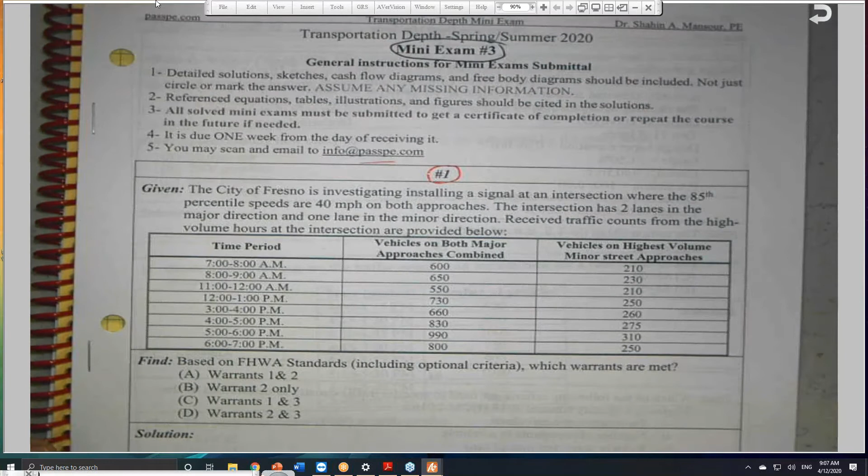If you look at the first problem, this is a signal warrant based on the MUTCD 2009. Let me write the entire explanation. I explain the warrant and sent you a flow chart for warrant number 1, which is the 8-hour warrant, the most confusing one.

I hope that I will have time to finish all the warrants from 2 all the way to 9, in some kind of flow chart like the one I sent you. A flow chart, I found it may be useful. I hope that I can complete this one day.

So here, for example, he is asking: the city of Fresno is investigating. I hope that you get a chance to print it out. Again, I should do my best to email it to you as early as I can, but things always get in the way. So I hope that you get a chance to print it out. If not, follow me, and when you print it, you will hopefully be able to retrace all the information that we talked about.

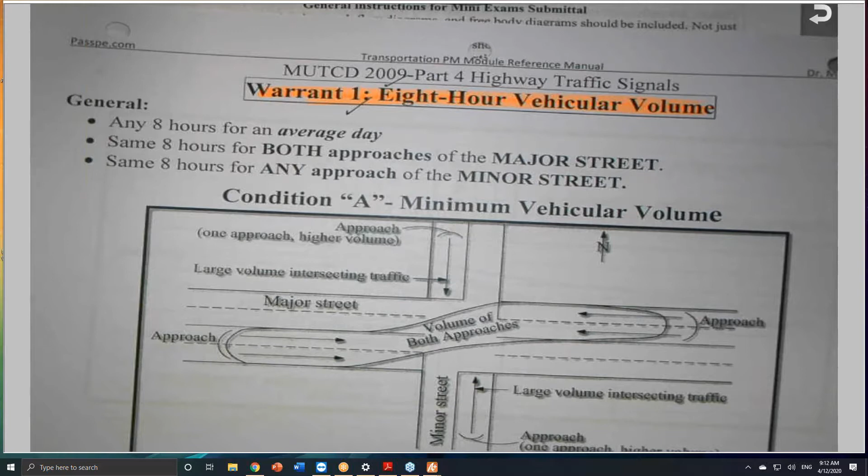So warrant number one, which is the 8-hour vehicular volume, they provided us with the big table in the MUTCD 2009, which is the current code. So the 8-hour volume, vehicular volume criteria is based on the number of lanes and the volume.

So if we consider this illustration, we have a major street, and here I assume that we have two lanes in each direction. The MUTCD, they call this an approach. So approach is a direction. So this is an approach and this is an approach. This is the definition of approach per MUTCD.

So if this is a major street, the MUTCD is looking to the major street volume, and they consider both volumes. This is why I put it that way - volume of both approaches.

So when we do the calculations, if the volume per approach is given separately, and sometimes they do that, by the way, you're supposed to add this to this. So they will tell you, for example, the westbound, eastbound, northbound, southbound, you have to know exactly. Here, for example, this problem, for the major approach, or the major street, sorry, he gave you the combined approaches. So here, he already added them up.

But in another problem, you will find that this table is divided into two, okay? And they will tell you the eastbound and the westbound, northbound, southbound, it depends on the direction. And in this case, you have to add the total. So along the major street, this is, for example, a northbound, and this is a southbound.

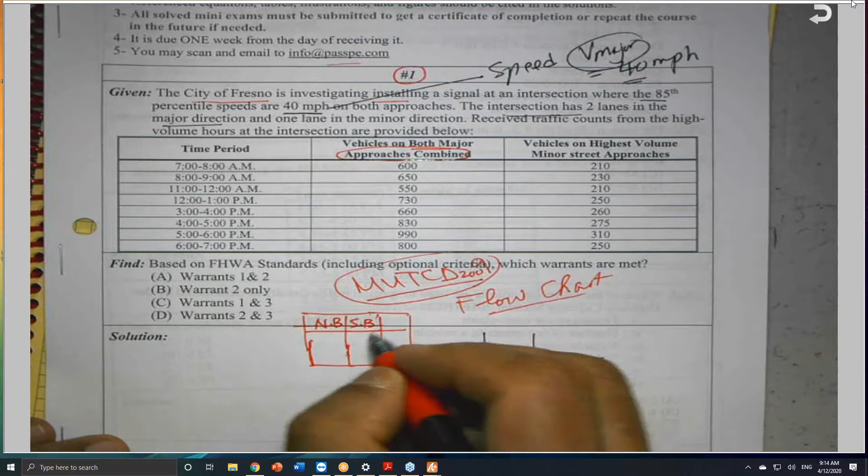Okay, assuming another orientation, and he gave you a volume here and a volume here. So in this case, you have to say total. So you add the numbers here and the numbers here to put them here. And these are the numbers that we are going to use to enter the table and decide if the warrant has been met or not. So I need you to be aware of that.

So here it is already combined, which makes our life a little bit easier. But for the minor street, the current code is - you have to define what is a minor and major. Okay, so this is also called an approach, and this is called an approach.

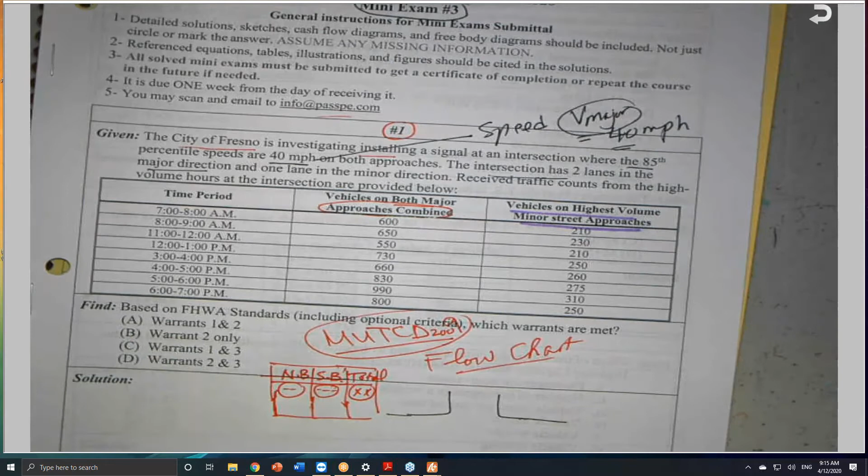So approach, it is one approach volume and one approach. Okay, in this case, since we are not adding the volumes on both approaches of the minor street, the code is saying the larger volume. So in this case, we are looking for the larger. And this is why you will find that the table given is 'vehicles on the highest volume minor street approach.' So in this case, whatever approach has the largest volume is going to be considered.

So far, so good. So this is the thing that I was referring to, the flow chart. I did this in order to help, and I hope that... maybe there is something similar - I didn't really search if there is something similar on the net or not, and you can search it if you have any flow chart that will help you understand the warrants. It will be a very good idea.

So anyhow, this is called condition A, which is the minimum vehicular volume. They came up with another situation, they call it condition B. And we'll see when we should apply condition A, and when we should apply condition B.

So this is the interruption of continuous traffic. Again, the same concept - this is the major, and this is a minor. These are the major, so in this case we are taking the two approaches together for the volume, and the same thing for the minor street, which is this one here, and the highest volume.

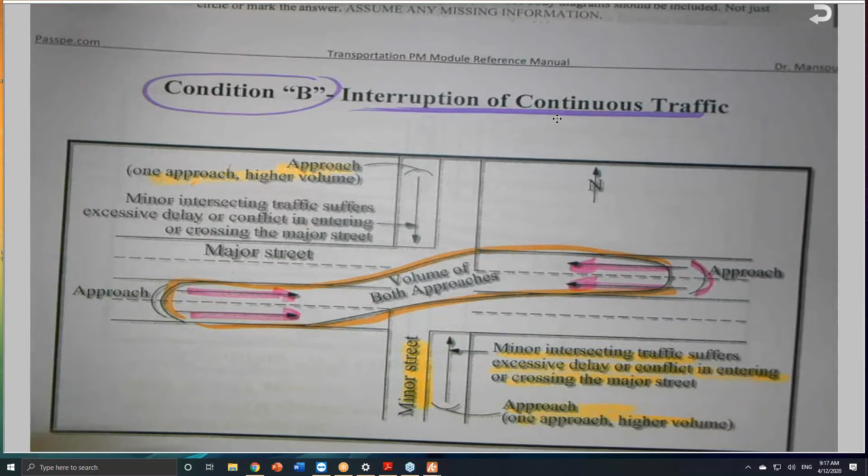This condition B, as in 'boy', intends for what? That the minor intersection traffic suffers excessive delay or conflict in entering or crossing the major street. So they came up with condition B in order to take care of the traffic along the minor street where there's excessive delay or conflict with the traffic on the major street. So every criterion they put has a justification, as I went over all of them when we covered signal warrants.

So we have something called condition A and condition B in the table. This table is given in the MUTCD and in every book available in the market, including mine, my transportation reference module manual.

So what I did, I took this and put it in the flow chart, these fine print notes below the table, to illustrate and explain to you.

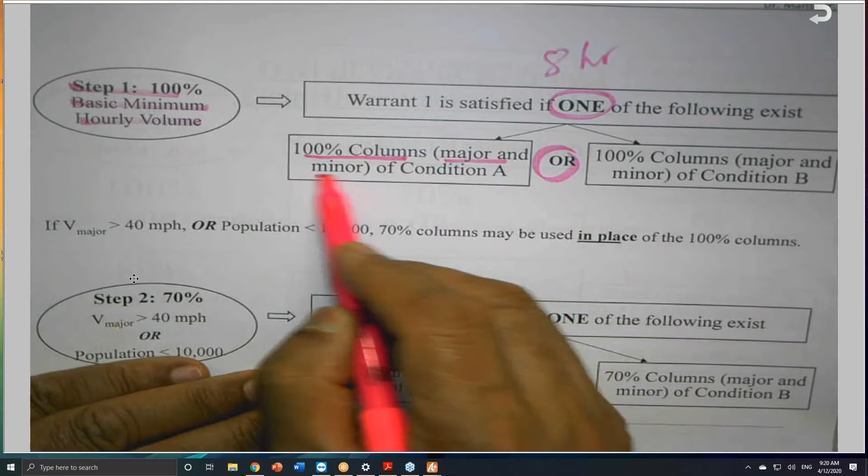Warrant number 1 is the 8-hour warrant. It is considered to be met if, and I call this step number 1, basic minimum hourly volume. We have to pay attention to the word 'or' and 'and'. So if the 100% columns, major and minor, of condition A, or 100% columns, major and minor, of condition B.

So either condition A or condition B for the 100% column, because we have a column here called 100%. Here it is, 100% for condition A and 100% for condition B. So if you have met the requirements or the volume, in this case, you are satisfied.

They came up with something called 70%, which can be used instead of the 100%. But when we use the 70%, this is step number 2 of my flow chart. This is step number 1 and step number 2.

Step number 2: if the V major exceeding 40 miles per hour, or the population less than 10,000 - and this is a key in the calculations. The moment you see in the problem statement that the major speed, V major, exceeds 40 miles per hour, or it hints at population less than 10,000, I will jump immediately here. Warrant number 1 is satisfied if one of the following exists.

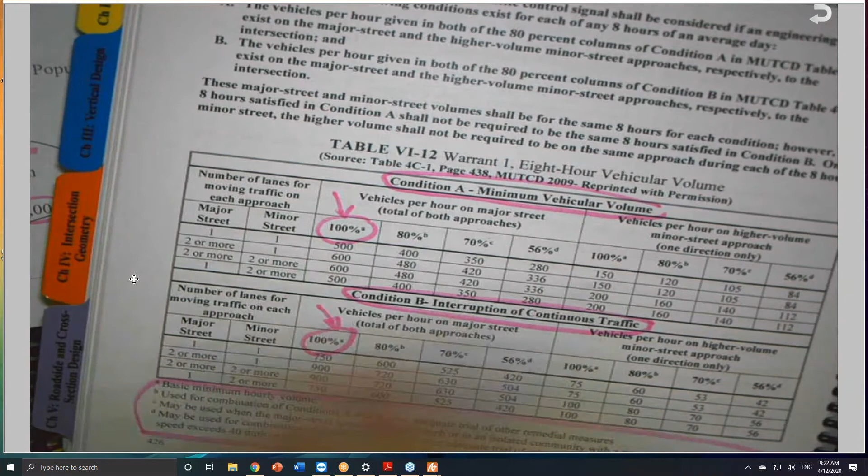Probably I think it is better to add 'if one of the following exists.' The 70% columns for the major and minor for condition A, or the 70% major and minor for condition B. Because we do have the 70% columns, here it is, 70% and 70%.

This is step number 2. Step number 3, we will go to 80% and 56%. 80%, which I call step number 3. Warrant number 1 is considered satisfied if the following exists, and both - you see the word 'both,' I put it, so you have to say 'and' here, since both conditions must be met.

So the 80% columns along the major and minor for condition A, and the 80% columns major and minor for condition B. This is step number 3.

Step number 4, which is related to the 56%. The 56% is similar to the 70% in the sense that if V major is given to exceed 40 miles per hour, or - remember the word 'or' - population is less than 10,000. So in this case, again, the word 'both' here and here.

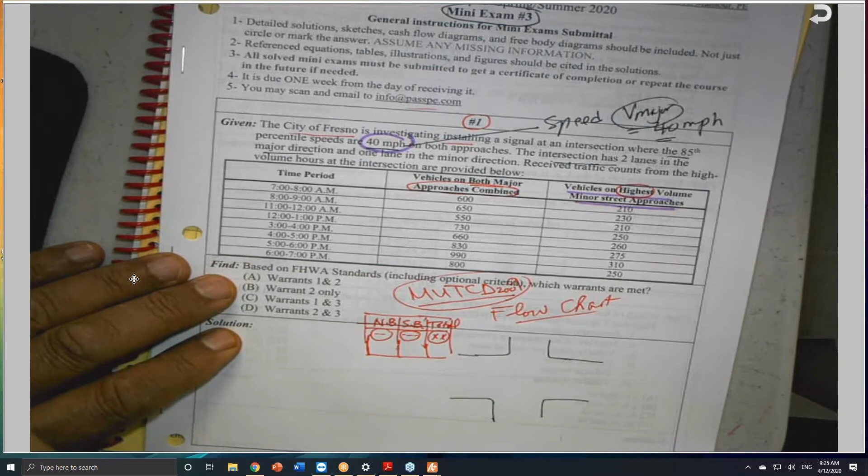The 70% and the 56% will be used only if the speed, V major, exceeds 40 miles per hour - exceeding, not equal. For example, in our problem here, he told you the speed is 40 miles per hour. So this is not qualified, because it's exactly 40, and the speed must be greater than that.

But not necessarily both in order to. So

This is a summary. If you remember the 80% and 56%, they are saying that both, that means this and this, and this and this. You have to be careful about that, okay? So in this case,

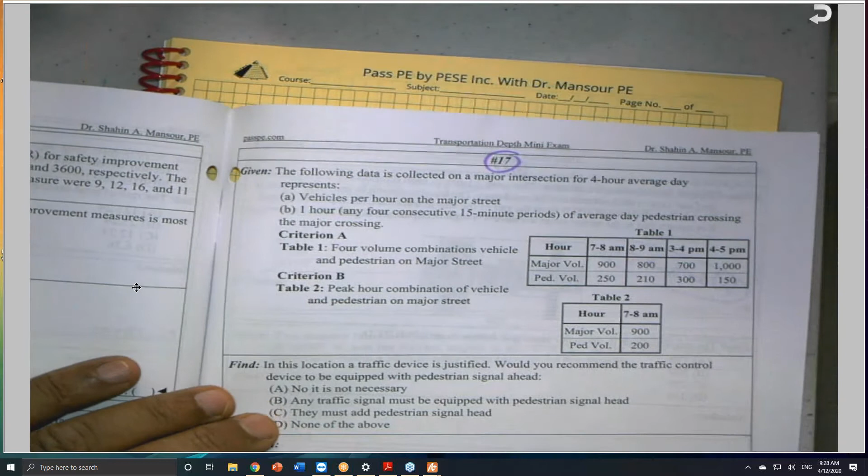Also related to traffic signals, and I don't remember if I included more. So anyhow,

I will be glad to scan this again and send it with my notes.

And I didn't get a chance, for those who attended the class yesterday, the civil breadth AM and the construction PM. I said I will do it after I finish, but believe me, after I finish, I was almost a case, because the night before I didn't sleep well. But I'm trying to push myself as hard as I can to help you guys, to keep you busy because you are sitting home, and I know this crisis.

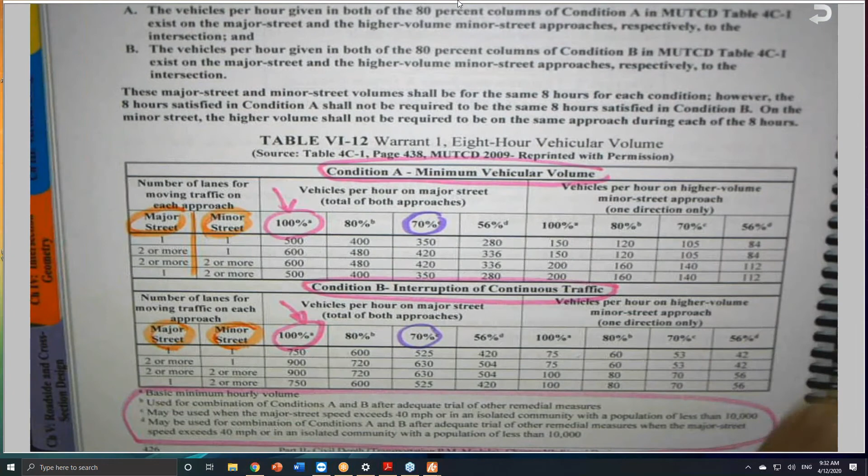So in this case, we are not having anything about the... look into this chart here. So this and this are not applicable in my case, the 70% or 50%, 56%.

So I have either 100% or 80%. And by the way, just for the sake of discussion, if you look at the volumes in condition A, the volumes here, 500, we have 750 here. 600, 900 here.

Okay, I needed to be aware of that. The volumes here, okay? So for the major street: 5, 7, 4, 6, 350, 525, 280, 420.

But if you look to the volume, this is a major. If you look to the minor, the picture is reversed. Here is 150, here is 75, 120 and so on. So the volumes here are more than here.

I needed to pay attention to that, okay? So based on that, even if you don't have the book or the table from whatever book you have right now, do you think warrant number 1 has been met? Warrant number 1.

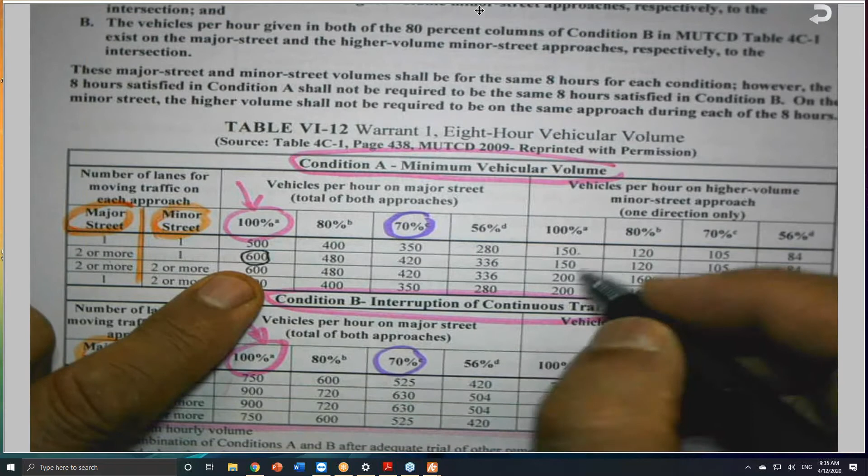I need 600 along the major and along the minor 150. Okay, the 8 hours must have these numbers, 600 and 150. So 600, I have 600, I have 550 here.

That's it. If you would like to say, oh wait a second, you tried 100% under condition A, but it says that I can go to condition A and B under 80%. Let me just do it, and I will tell you why I'm doing this. If you go under 80% for condition A and B, you must meet condition A and B.

So this here, 480 and 120. For here, I have 720, and here I have 60. We just failed the 550. So in this case, the 720 obviously will make this fail. So warrant number 1 has not been met. Warrant number 1, the answer is no.

If this is 100% sure, I can eliminate this answer, and I can eliminate this answer. Agree or disagree? We need to make sure that all of us are on the same page, because I need to make sure that you really understand all these things.

Okay, so the answer is no, as I heard it from one of you. If you disagree with our friend, or agree with me, let me know. So far so good.

Warrant number 2, 4 hours. The 4 hours, they are saying that, which I will take you through, the 4 hours, which is also MUTCD, the 4 hours. The 4 hours, they give us 2 charts. This is a chart here, which I call the base. And this is figure 4C-1 on page 440 if you have the original document with you.

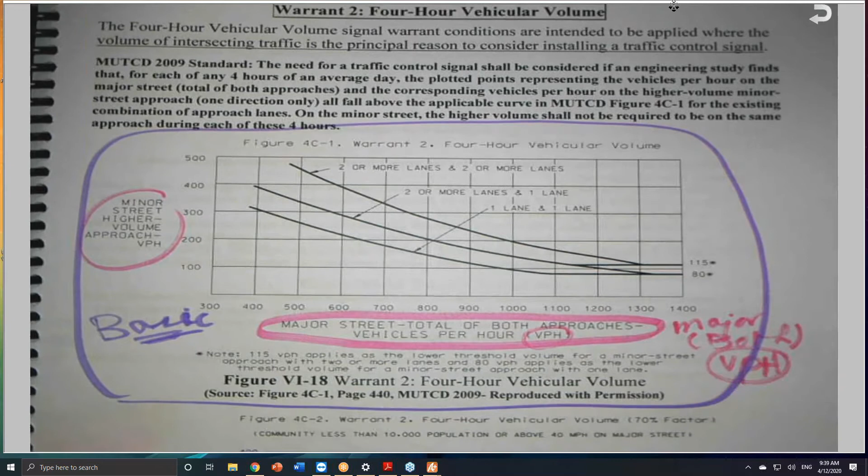VPH. This is a minor. And in your book, you try to write as much as you can. It is one approach, or the higher volume. Higher volume. Also, it is VPH, vehicle per hour.

And they came up with another chart below that, which is figure 4C-2. And this is the 70% factor. And the 70% factor will be used only if the V major exceeding the 40 mile per hour, or community less than 10,000, or population less than 10,000.

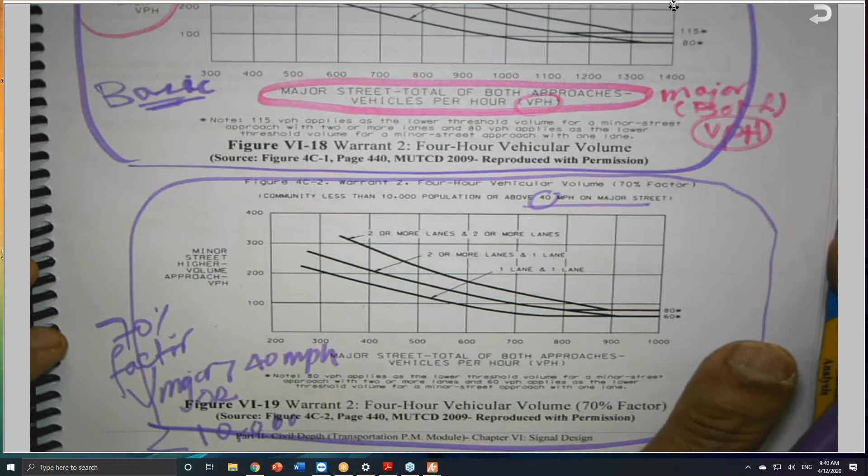This is the way I will do it. So you have to decide, are you going to use this chart or this chart, the base or the 70% factor chart, based on the given information. Obviously I'm not entitled to use this. I will use this because I don't have the 40. I have 40 mile per hour only, so it's not exceeding.

And they came up with 3 graphs as shown. We have 2 and 2, number of lanes, 2, 1, and 1, 1. The first number is referring to the major, and the second one referring to the minor. So I have 2, 2, 2, 1, 1, 1. And these are the number of lanes per direction, not the total number of lanes. And they provide us with these 3.

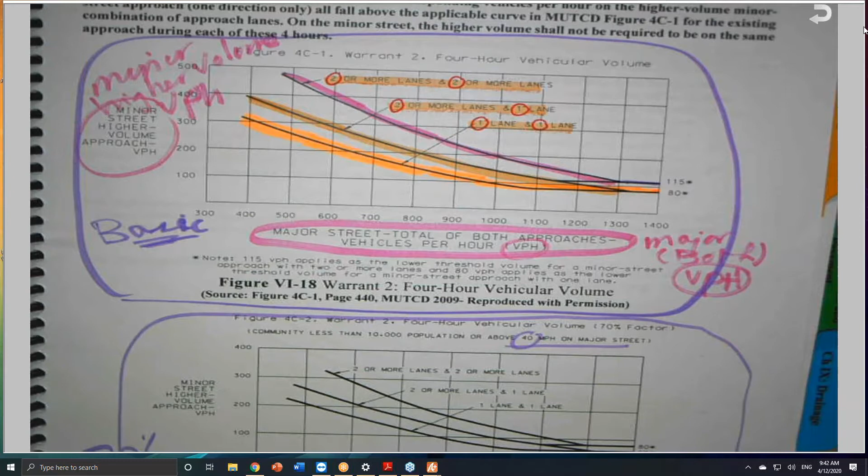And I know probably some of you will say, wait a second, why you jump on warrant number 2? Why you don't go to warrant number 3 directly? That's just, I put them in order. Because right now we eliminated one answer A and answer C because warrant number 1 is out. So 2 only, which is the current one we are doing right now, and here 2 and 3. So some of you may say that you already tested 1 and we eliminated 2 answers. Okay.

Why don't you go directly to 3? I agree with you, go to 3. And if you meet number 3, that means the answer is D, without checking number 2.

Are you following me? So the arrangement here is very, very important. This is exactly similar to what we discussed, but I just put them in order.

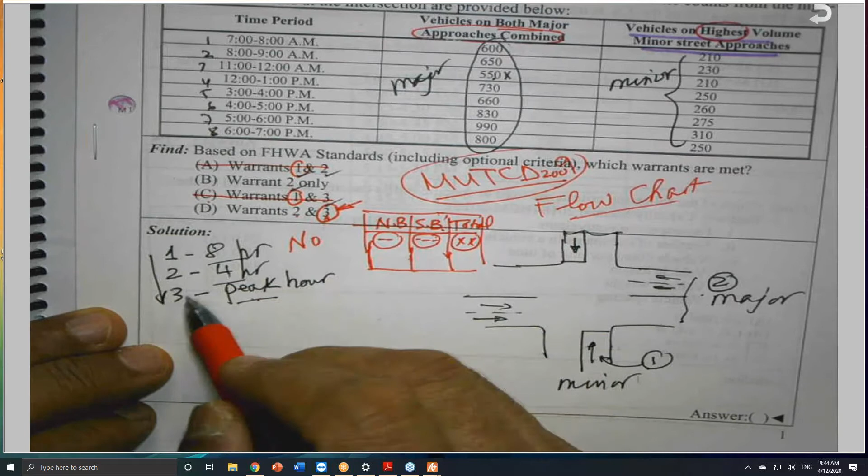So here, if I were you, probably I would jump on number 3, which is the peak hour. After that, if number 3 is meeting the warrant, that means the answer is D, blindly, without checking number 2. But I check number 2 on the way, just okay.

To explain it one more time, this is my intent. Okay, so I don't like it. Because the 1 hour is coming, it does have some graphs also.

So I said I will explain the graphs here, and the graphs for warrant number 3 will be almost the same. So the criteria here, they need...

Any 4 hours on an average day, any 4 hours where the volume along the major, both approaches, and the volume along the minor, the heaviest, they should fall above.

So I will select the proper curve, and after that I will select the volume. I need 4 points to be higher or above these curves. Above means here, just barely above, even by 1 is sufficient.

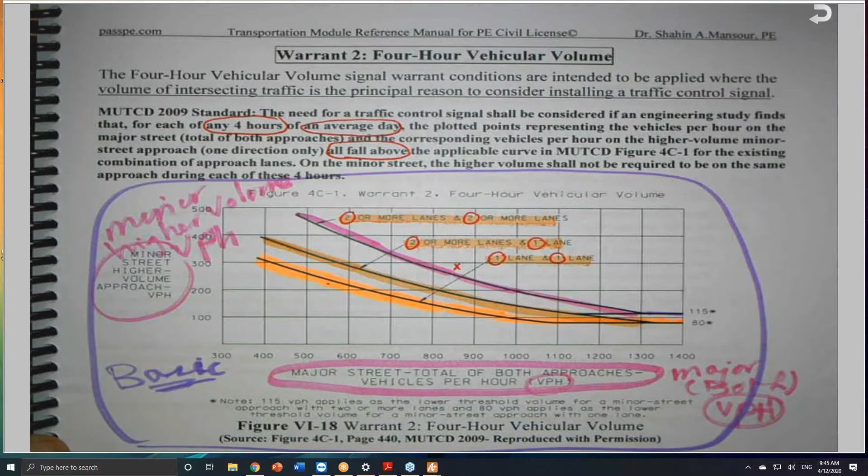So it must fall above. I will write it this way, at least not on the line, fall above. And I need 4 hours, I need 4 points. 4 hours mean that 4 points must fall above the proper curve based on the number of lanes.

We have 2,1, so I'm using the middle one. 2,1 is the middle one. This is my problem here. This is the way how warrant number 2 is working.

Warrant number 3, they are saying that, as I explained in class, they call it the peak hour. 2 things I need to pay attention to, or in fact 3 things.

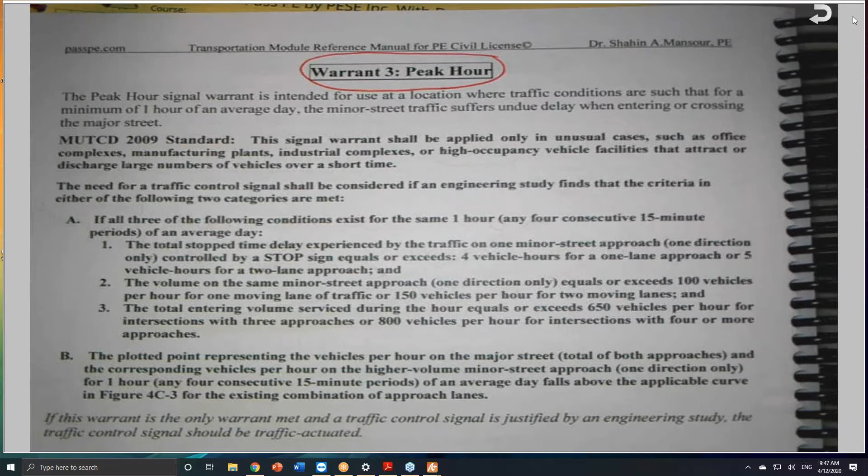Every time we talk about warrants, I need to pay attention to the language, because the language is very important. And this is why it took years for them to come up with these regulations or these codes.

So generally speaking, for warrants, let me write it on my notes, at least when you receive my notes. So it is, today is 4/12. This transportation PM.

So for warrants, or traffic signal warrants, you need to pay attention to, number 1, the name of the warrant. Because he told you warrant number 1, warrant number 7, warrant number 8. Try to remember as much as you can as far as names. So warrant number 1, warrant number 2, 3, all the way until we hit number 9, which is railroads.

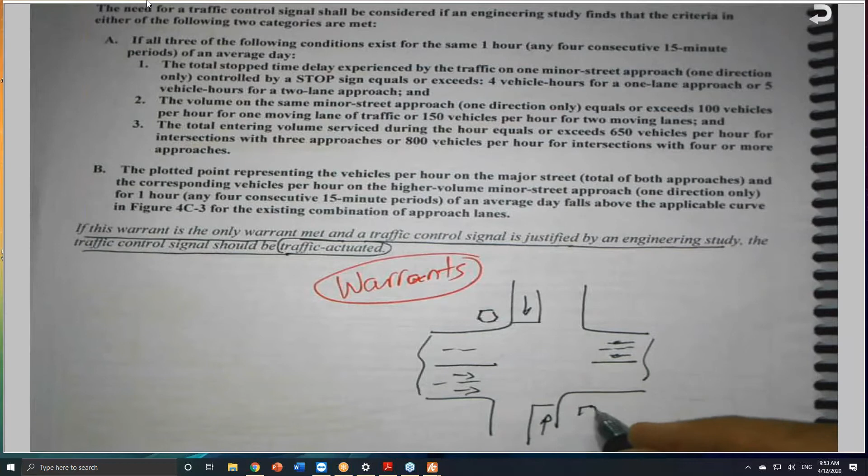Minor, they found that if you do have some kind of school here along the minor street, school, all kinds of business or shopping center, any kind of that at a certain hour at the end of the day, there will be a lot of traffic generated here. One specific hour, maybe 4 to 5 or 3 to 4 when the school, the businesses, and so on. So they said we need to take this into consideration because I don't like to have this long line of people waiting here while the major traffic is enjoying. So in this case, we are going to consider installing a signal in order to accommodate the traffic along the minor street. So this is what is meant by 1 hour, because there is one specific hour.

And they came up with identical, sorry, not similar, but again the major one and the minor, all these things I already talked about more than once. So for those who attended the first time, since I make this free, some of you already heard this before. So forgive me if you are hearing the same song.

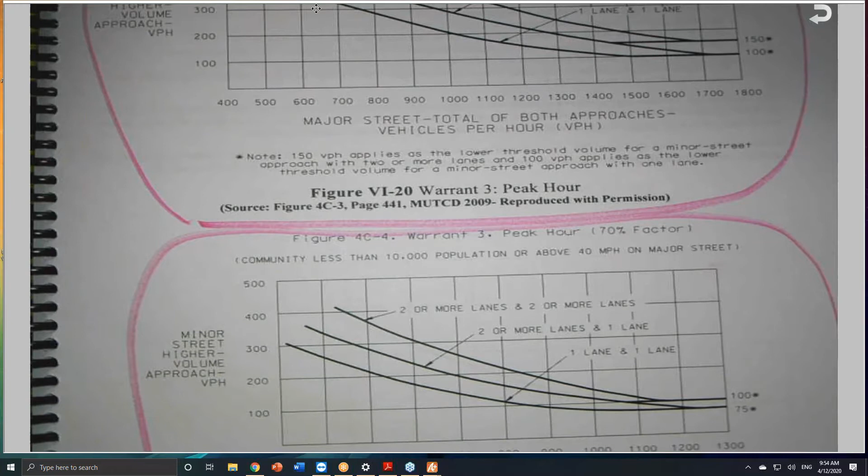The major and the minor. So this is the basic or the base case. And this is a 70% factor. And the 70% factor also applies when the V major exceeds 40 miles per hour, or the population is less than 10,000. Try to remember these things.

Here they are saying the same thing. We have 3 curves, 2 and 2, and 2 and 1, and finally 1 and 1.

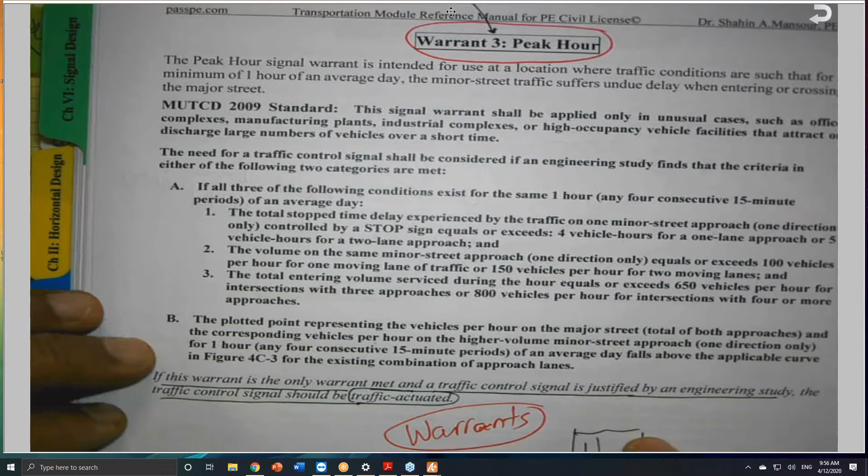And again, the word 'fall above', I believe I mentioned somewhere here. So fall above, and the hour is an hour, 4 consecutive 15 minutes. And the major street is still the total both approaches, and the minor is 1.

But when you pick the hour, by the way, it must be the same hour. Don't pick and choose. I cannot move around and say, oh, this hour and that hour. If you pick this hour from 12 to 1 as your criteria, you pick the major and the minor at the same time. I don't come here and pick another hour. You cannot pick, it must be the same hour. Be careful about that.

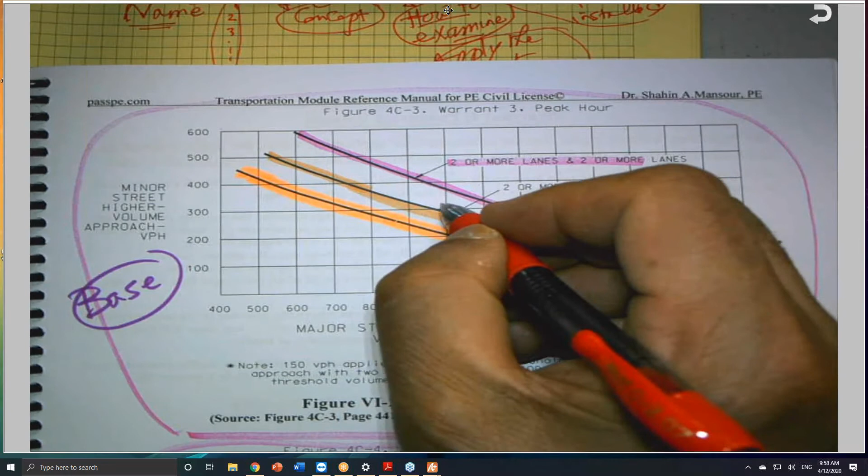Okay, so let's plot 1 or 2 points just for the sake of discussion. If you look, I can pick the largest number. For example, I need 4 hours, so if I have 990, because any 4 hours on an average day or a specific hour, okay, or 1 hour. In this case, for example, I have 990 and 310. If I take the 1 hour, which is warrant number 3, so 990, which is almost here, and 310, okay, so 990 and the 300, 310, it is somewhere here. Okay, so to the best of your engineering, take a scale with you. So 990, and I will be using 2 to 1, and this is 310.

Something like that. Okay.

The 85th percentile speed of 40 miles per hour. Something very important in speed studies, we covered it. The 85th percentile is the one that adopted the current code. They adopted the 85th percentile. What is the 85th percentile?

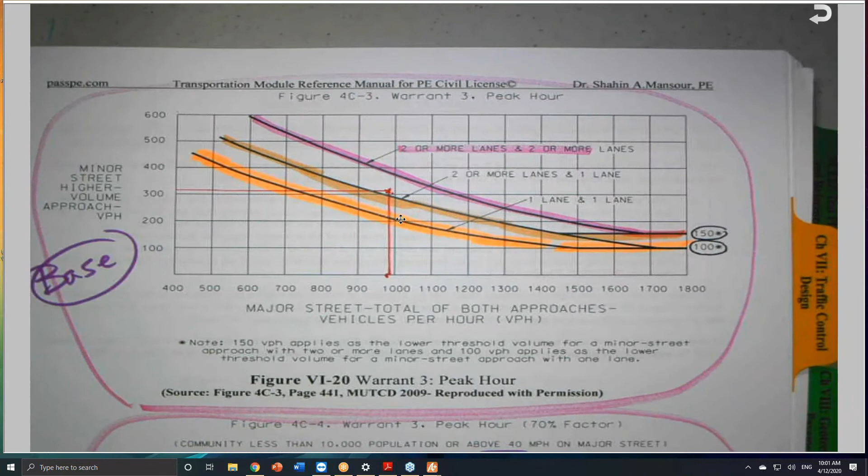Ray is asking a question about these lines here. As you can see here, they have 150 and 100, and they have the asterisk here to indicate what is meant by that. Note, the 150 vph applies as the lower threshold volume for a minor street approach with 2 or more lanes.

So the 150 applies for this and this, because for the minor street, wait a second, with 2 or more lanes, and the 100 vph applies to the lower threshold volume on a minor approach with 1 lane. So this one here, the 150, is applicable only for 2 or more lanes, because this one here is the minor, so the second here is a minor. And this is 1 lane and 1 lane.

So the 150, you may say that probably this line shouldn't be a solid line, because right now with 100, I have 1 and 1, so this line here, probably it should not continue, because when you come here along 2-1, 150 is the lower threshold for a volume minor street approach with 2 or more lanes. So probably this solid line here, if we can make it not solid or get rid of it completely, I will look to the original document to see if this is a typo from our end, but this is the explanation, my friend.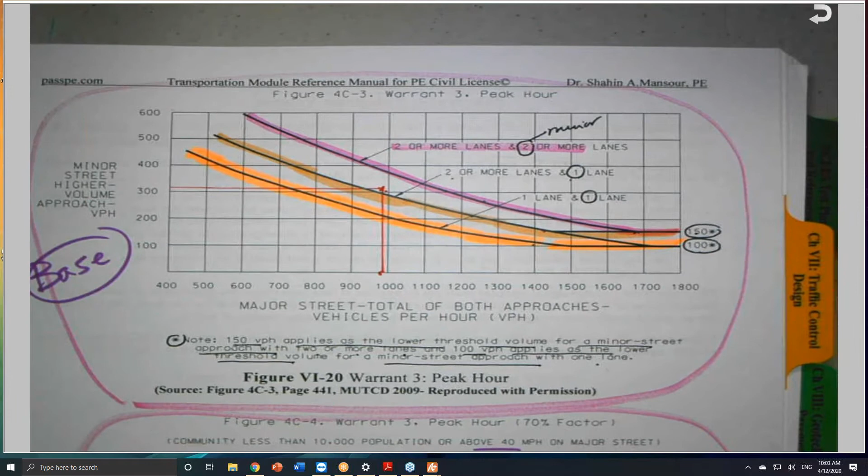I'll try to locate the MUTCD if I have it here. It could be a little tiny error here or there. Let us see, I will look at it. I don't like to spend time, I will look at it. And if there is a typo from our end or from the graph, I will get it to you, my friend. So I print all the questions that you ask, and I will be glad to answer them if we did not get a chance to answer them here.

Confusing, having an extra, yeah. So I will look to the original document and verify, but based on the text, I believe the text is correct, if I remember correctly.

So probably this line here, why this line here for 2-1, this one here, no, both of them, this and this, they go here, which makes more sense. Here it is, this for 2, 1, and 1, 1, which is the minor list, so the 150. But this 100, sorry, the 150 is only for 2 or more along the minor. It's a good point that I will look at it and see if it's clarified. But based on the discussion, this line here seems to me to be the one causing the confusion. Thank you for all these questions, they are all valuable.

And we are talking about the 85th percentile. When they talk about speed, they said the V major exceeding 40 miles per hour, or the population less than 10,000. So those are the criteria. But the V here, we're talking about the 85th percentile.

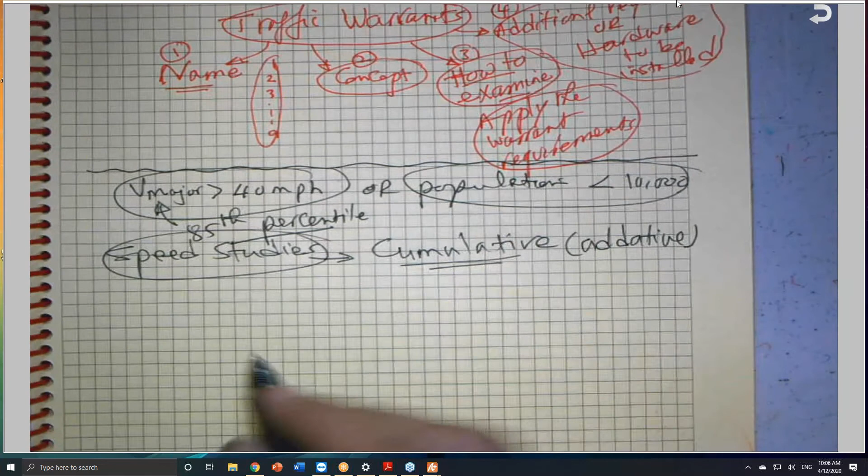Cumulative. The word cumulative means additive. And we use the word cumulative in 3 situations, by the way. This is one of them, speed studies.

We also use cumulative when we're talking about mass diagram. And I believe in the NCEES there is a problem related to mass diagram. It used to be at the end, yeah, here it is, still there. Mass diagram. And I'll be glad to go over right now, since we're talking about cumulative, what they meant by cumulative.

So this is the first scenario or situation we are using the word cumulative. This is the second scenario. And the third scenario is when we calculate what is known as the FM, which is the fineness modulus.

I believe fineness is not correct... F-I-N-E-N... Or it was correct, fineness, F-I-N-E-S-S. No, it was correct originally. Fineness modulus, F-I-N-E-S-S, fineness modulus. The FM for sand.

When we calculate the fineness modulus for sand, we also use the term cumulative or additive. So those are the 3 scenarios or situations where we use cumulative: in mass diagram, and in fineness modulus calculation.

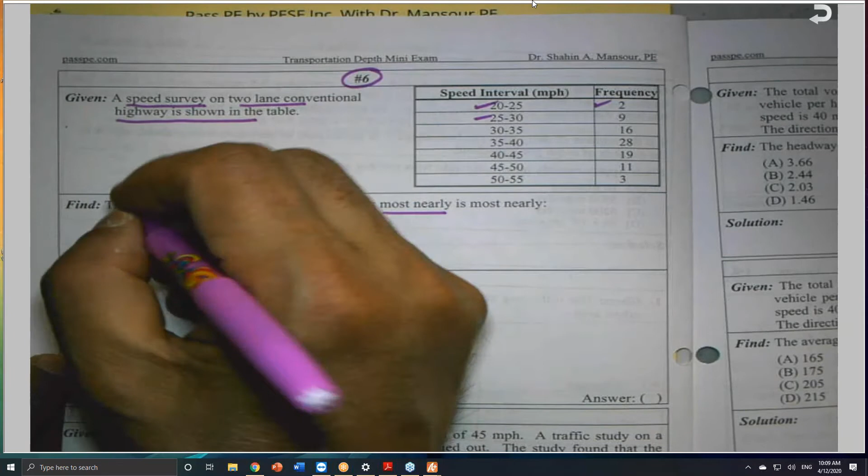Normally, when this is a calculated 85th percentile, calculated. But when we report the speed, it is in 5 mile per hour increments. This is the rule that we use for reporting a posted speed: it's a 5 mile increment. You will never find a speed sign that says 44.7 or something like that. But just for the calculations, for the calculated value, yes, we can have a fraction as indicated here.

So since we are using the cumulative, we need to create another column, or establish another column. And this column, I can put it here. I know it is a little tiny column, but it is. And I will call this column cumulative.

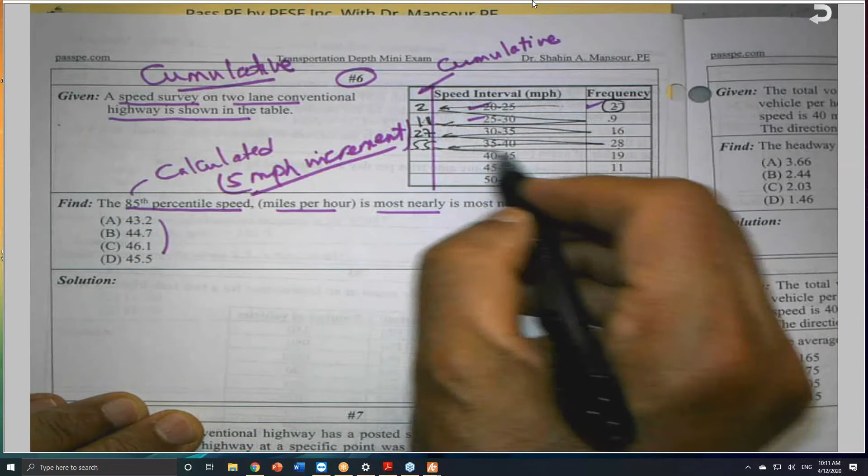And the way we establish that, we take the frequency and we put it: 2, and 2 and 9 is 11, and we add this here, and after that we take this, add it to this, and so on. Take 11, add it to this, will give you this, which is 27. 27 and this is 55. And so this and this will give you this, and this will give you this. So 9 and 5 is 4, and this is 2, so this is 74.

And I will take this and it will give you 85. And if you take this and add it to this, it will give you 88. This is called the cumulative. You're taking the previous number and adding it to the current, and so on. Did I get all my numbers correct? Let me know, please.

After we generate the cumulative, I am looking for the 85th percentile, meaning 85 percent of the 88. This will give me a number. Here's my calculator. So the 85th of the cumulative, this will give you 74.8 vehicles.

Sometimes I assume something. Probably not. Probably not. It's coming. Okay, probably it's coming. This one I finished that. Oh yeah, no, it's not here. Probably I mix it up. Yeah, it's coming later on.

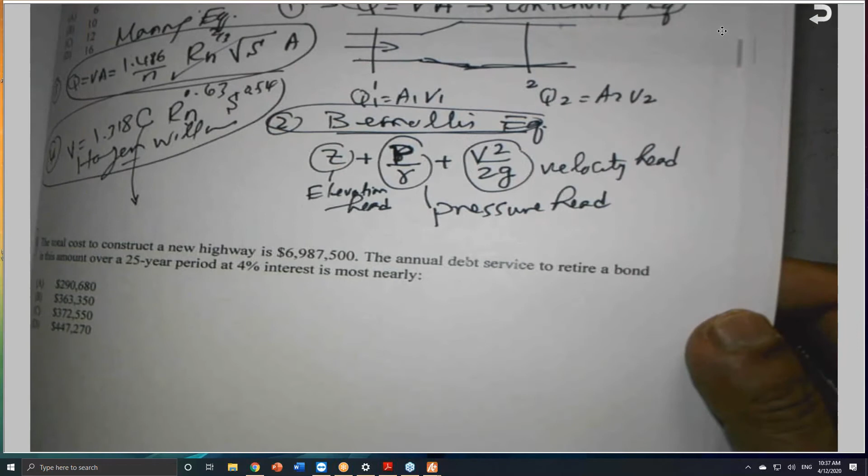As I told you, the cumulative approach is used in speed studies and in mass diagram calculations, or mass diagrams in general, and the fineness modulus calculation. I'll be glad to go over any of these. The problem in the transportation blue book, the mass diagram problem I was referring to, here it is in this book.

So the problem 537, let me explain it very quickly, and I will be glad to send you. I do have some additional mass diagram problems, I call them 11 mass diagram problems.

So this is a problem: given the earthwork volume shown in the table, the first balance point on the mass diagram is located at what station, and he gave you 4 answers here. For those who haven't heard this before, a mass diagram is a graphical relationship between the volume and the distance or station along the center line or whatever reference line it is. So this is the station line, whatever the stations are, which is a distance—it could be 100 feet or 100 meters, as you know.

And this is a cumulative volume. The y-axis is a cumulative volume. And they agreed that the cut will be positive, and this is 0 here, and the fill is negative.

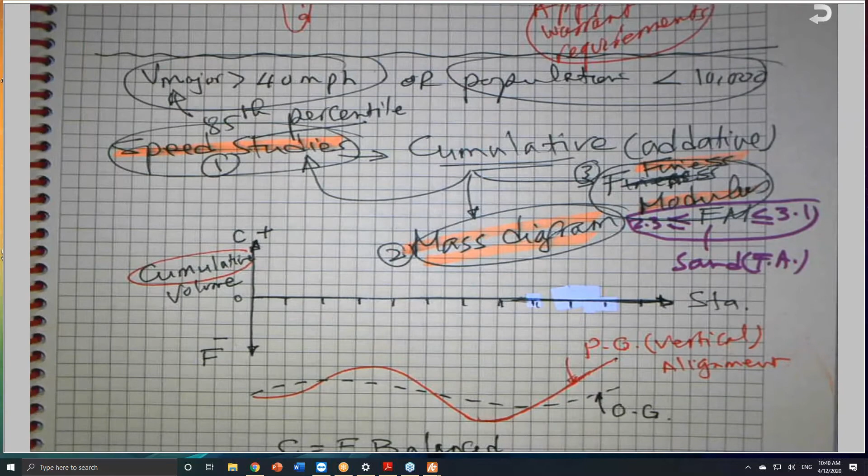So this is a station extended a little bit to come here. Okay, station. So we might have cut equals fill, which is the best scenario, which is a balanced job, or cut greater than fill, where you have excess, or sometimes we call it waste, or maybe cut less than fill. So we have deficit.

And in deficit, we can substitute the deficit by local borrow or imported borrow, where we get the soil from outside or locally from within the project limits or within the right-of-way limits. So this is a hypothetical situation here.

Okay, we can translate this into this to get a mass diagram. So every time we are crossing, these key points are very important, because here, as you can see, we have cut, and we have fill, and followed by cut, and we have fill. Okay, when the OG is below, we have fill. When the OG is above, we do have cut.

So if we draw a hypothetical mass diagram to reflect this, these key points are very important because they will indicate the low and the high points, where we have a change from cut to fill. This is a high point, and where we change it from fill to cut is a low point.

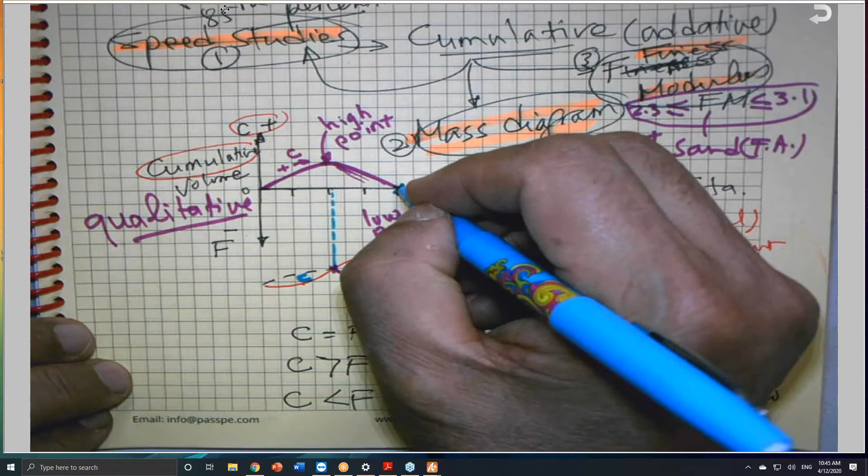Balance point, where cut and fill are equal. So the amount of the cut from here to here, the contractor will come and dump it here into the fill area until he finished all the cut, and we are in balance. And after that, we still need fill. So we're going to get to fill. This is another balance point.

So when we're crossing the station line, by the way, sometimes we call it balance line. This is called the mass diagram. And there is a lot of problems. As I said, I have 11 mass diagram problems. I would be glad to send it to you in order to explain or try to make you more familiar with the calculations or doing the mass diagram.

So if you look to the problem that's given in the NCEES, he gave you the XY, the coordinates. Maybe he's trying to attract your eyes to this. So this is the station line, this is in feet. And this is a cut, which is a positive, as you can see above the zero. This is our zero reference here. And this is the fill, which is negative.

But I needed to be aware that these volumes are cumulative volumes, cumulative, not absolute. They should write cumulative volume, but probably they didn't add the word cumulative because probably they assume that we know that.

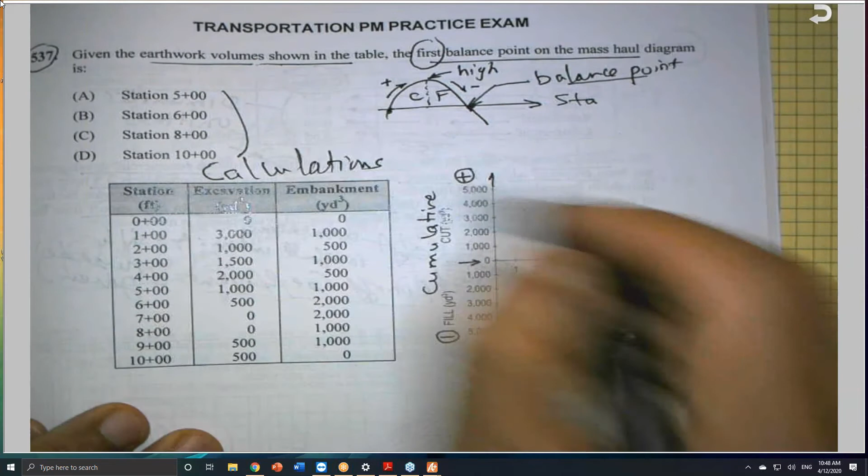We can get the balance point from graphically plotting the mass diagram, which is time consuming, which I don't recommend. Even though he invited you to do the calculations. But the diagram cannot be drawn until you finish the table. So the calculations are required anyhow. The calculations are required to construct the mass diagram.

And basically, we are going to add another 2 columns. And the word cumulative is going to be, let me add them here to my left. And you can do this very quickly. It will take, yes, the first 2 or 3 problems, maybe it will take some time from you, but after you do a couple problems and understand the concept, it will be a piece of cake.

Okay, so I'm going to create 2, or establish 2 columns here. One is called the algebraic sum, and this one is cumulative. Normally, this is a cut, C, and this is the embankment, which is fill.

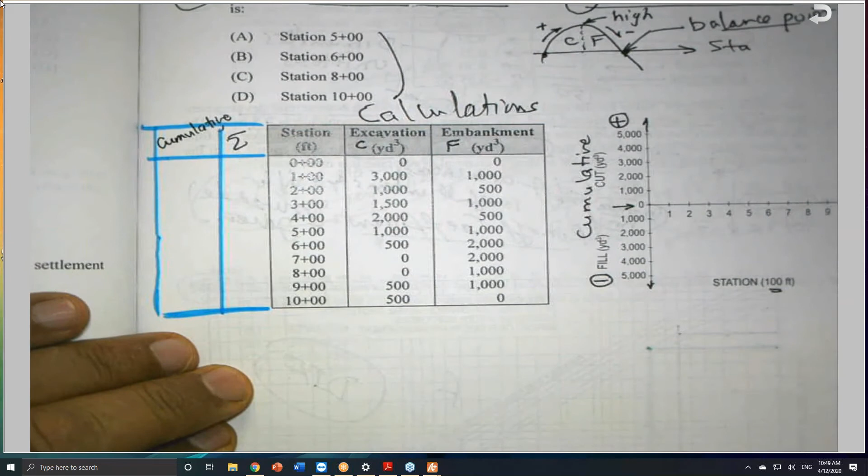Here, he did not give me any adjustment factor, by the way, which is like swell factor and shrinkage factor. Swell, either a swell percent or shrinkage percent. Sometimes they give you these numbers, like yesterday. Maybe this is 12% and this may be 14%, maybe. Sometimes they give you that, or sometimes they give you the swell factor.

Swell factor is greater than 1, which is 1 plus the swell percent. Or he might give you the shrinkage percent, the shrinkage factor. Shrinkage percent is given, which is less than 1 for all soils except rocks. Rocks do have a shrinkage factor of greater than 1. But for sand and silt and clay and gravel, name it, all these or mixture of these, the factor is less than 1.

So here he didn't give me anything. That means that no adjustment. I need you to be aware of that. No adjustment is required or is needed. No adjustment is required.

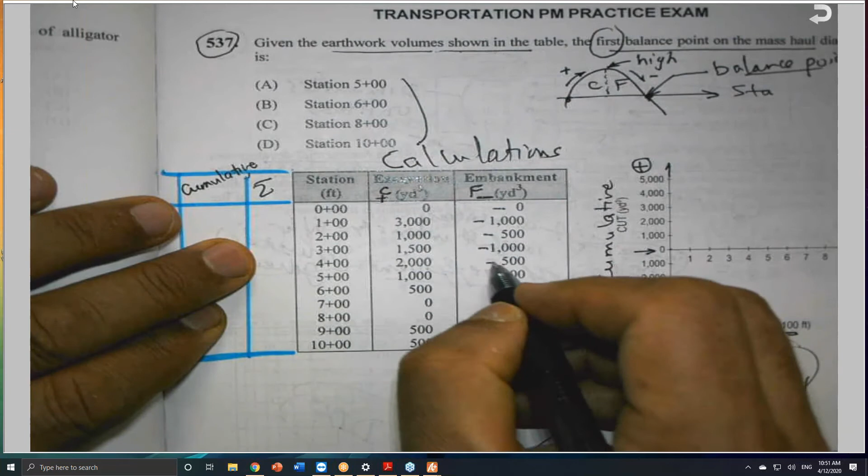Obviously, minus 0 is 0, but so here I have 0 and 0 is 0 at station 0. I have minus 1,000 and this will give you plus 2,000. And minus 500 and this, it is 500. And the station 3 minus this is still 500. And this is 1,500. And this will give you 0. 1,000 plus and 1,000 minus.

Here it starts to have minus right now, minus 1,500. And this is minus 2,000. And this is minus 1,000. And this is minus 500. And finally, this and this is 500.

This is called algebraic sum, or just summation, algebraic sum. You are adding the cut and the fill, and I assign a minus to be much easier for me, instead of using letter C and F. The third column, this is the cumulative column, is the ordinate of the mass diagram, which is this.

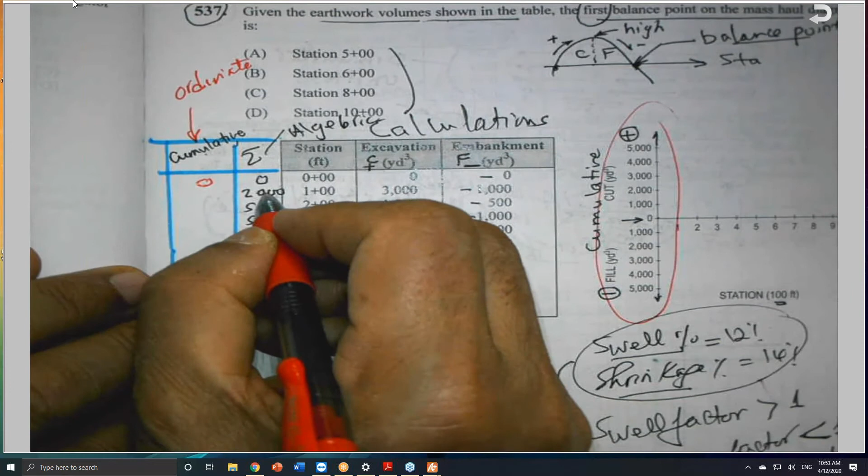In this case, it must be cumulative. Cumulative means starting from 0, I will take 0 to 2000. By the way, let me stop here. You might see a 0 here at station 5, and station 5 is among the answers. You may say that this is the balance point. This is wrong, totally wrong. Don't say, oh, I have 0 here. No, the balance point must be obtained from the cumulative, not from the algebraic sum. Be careful about that, because they put some answers to match the mistakes.

So after that, I will take the 0 added to 2000 will give me 2000. I will take 2000 to 500 will give me 2500. 2500 I will add it to this will give me 3000. And the 3000 added to this will give me 4500. And 4500 and 0 will give me 4500. 4500 added to minus this will give you 3000. 3000 and negative 2000 will give you 1000. And 1000 and minus 1000 will give me 0. And 0 and minus 500 is minus 500. And minus 500 plus 500 will give me 0.

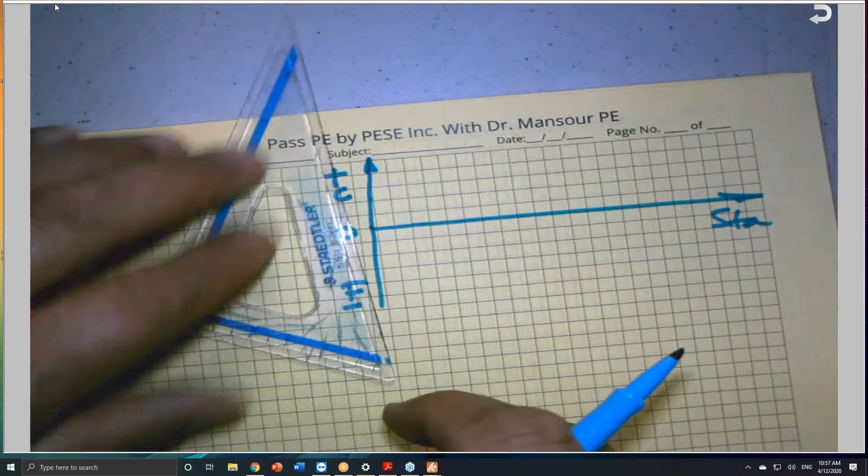Because as I told you, the mass diagram could be either balanced, or cut more than fill, or fill more than cut. So if I draw this is a station, and this is 0, and this is a plus, which is cut, and this is minus, which is fill. Sorry, my line is not perfectly vertical. Here it is. Sorry, my line is for my ordinate.

So there are three scenarios. Any mass diagram could be either a straight line or a curve, it depends. Let's assume it is a straight line this time. You can come like this, something like that, and you end it somewhere here. Since you started from here and you ended here, that means cut equals fill, which is a balanced project. And this is what normally we try to do, in order not to have excess soil or not to get soil from outside. No imported borrow and no excess. This is a perfect job.

And this is a high point, as you can see, this is a high, and this is a plus, and this is minus. And this is the low point. Low point, it changes from fill, which is minus, to a cut, which is plus. Positive slope, as you remember from school, if this is x and this is y, so this is zero slope. All these lines have positive slope, and these lines have negative slope. Slope, which is dy by dx, as all of you know, or tangent theta, where theta is measured with respect to the x-axis, or the horizontal.

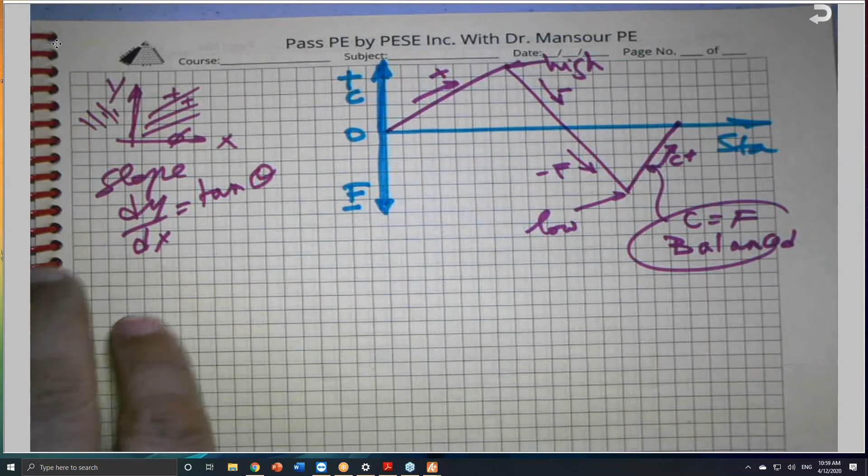So this is one scenario. A mass diagram could have something like this. It could be also a straight line or a curve. I could have something like that, and I will end it somewhere here. Let me draw it nicely here.

Start from 0, and here I ended above the 0 or the balance line. So in this case, cut is greater than fill. How much is cut? Whatever the amount here, because this ordinate normally is a scale. We put the numbers here as given in the NCEES.

This is a balance point. This is a balance point. This is a balance point.

And finally, we could have a mass diagram like this. You can have a mass diagram that is... let me try to find a color to match. You may start somewhere here and you ended somewhere here. This one here, the fill is greater than cut.

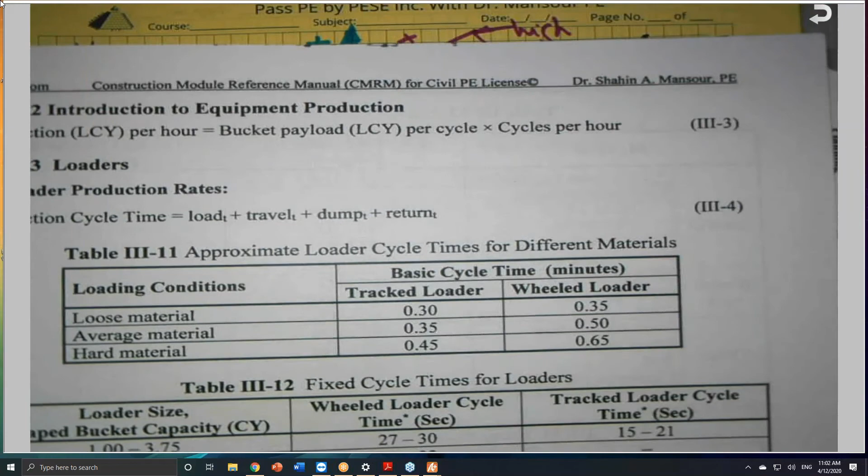I would be glad to send it. If I'm not mistaken, they are in my construction books, and I can send it to you. If it's not handy right now, I can try to remember where they are located, and I will be glad to send it to you, because the mass diagram problems are easy and straightforward if you understand the concept very well.

Maybe here in the PM, I believe in the PM mass diagram. Yeah, here they are - these equations here. 1, 2, 3, 4, 5, 6. Yeah, 6 equations for earthwork mass diagram relations, and I can go over each equation one by one. I will do my best.

Let me keep this open. Hopefully I can fulfill all my promises, because as I said yesterday, when I say something, I really intend to do it, but because of the time, or because I forget, please remind me if I forget something or if I promise something - so the equations for mass diagram.

Okay, and we can talk about this more. Let us go back again to the exam. Hopefully I can cover as many as I can. But let me grab a question from one of you - we need to know the relationship between...

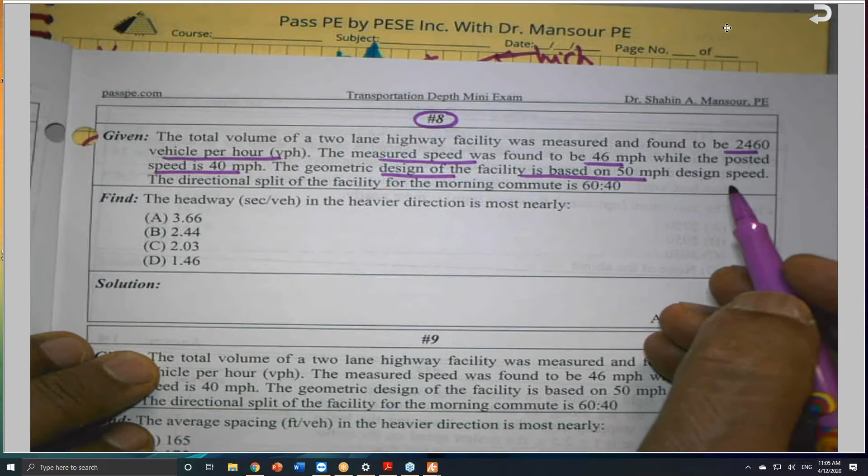Let us look at problem number 8. The total volume of a 2-lane highway facility was measured and found to be 2460 VPH. The measured speed was found to be 46 miles per hour, while the posted speed is 40 miles per hour, and the geometric design of the facility was based on a 50 miles per hour design speed, the curves, and all these things. And the directional split of the facility for the morning commute is 60-40.

Directional split, okay, we call it D. I know we are using the D a lot. So the D here, we are saying that it is 40% in one direction and 60% in the other direction. So this is what is meant by 60-40. And we use this equation when we calculate ESALs.

We are going to see this, the equivalent single axle load, ESAL. We are using the D, the directional split, because I would like to know how much traffic is going in this direction and how much traffic in this direction, because as you know, the ADT or AADT is the volume on both directions. So I have to split it.

So the split is based on the percentage given in the problem statement. If it's not given to you, we will use 50-50. So 50-50 is the default directional split. So if it's not stated in the problem, we go with the default as the number I'm going to use.

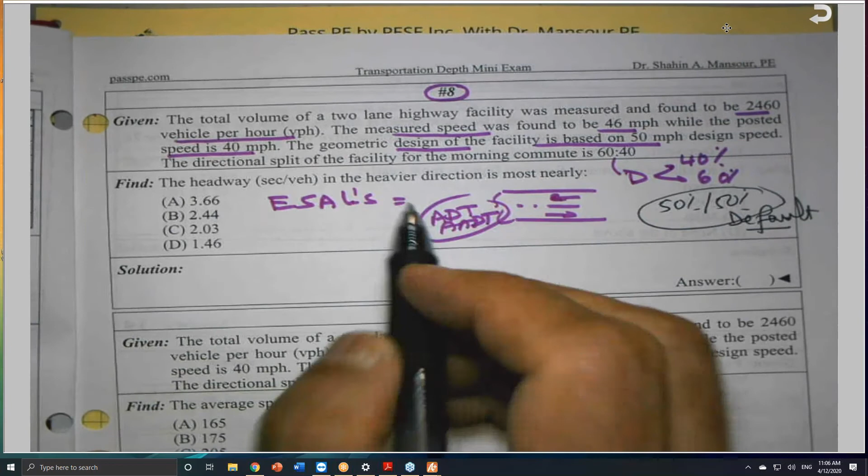Okay, so here I have 2460, and he would like to calculate the headway in the heavier direction. The heavier direction, I take 60% of that volume. So this will give me a certain volume - how many vehicles per hour? 2460 times 0.6 is equal to 1476 VPH. This is the first step I will do, which is get the heavier direction, because he told me.

What is the headway? Headway is a definition.

If I'm standing here with a stopwatch on the side of the road in a safe area, and I measure the time between two consecutive vehicles measured from the same point, either front bumper to front bumper or rear bumper to rear bumper, this time is called headway. So the headway is in units of seconds per vehicle. The units are very important. This is 3.66, or seconds per vehicle.

So the headway, we have an equation: headway is equal to how many seconds in 1 hour? It is 60 times 60, 3600. This is seconds per hour, divided by the flow rate. The flow rate is in vehicles per hour, VPH. Units are very important because if you look at this, hour will cancel with hour, and we end up with seconds per vehicle.

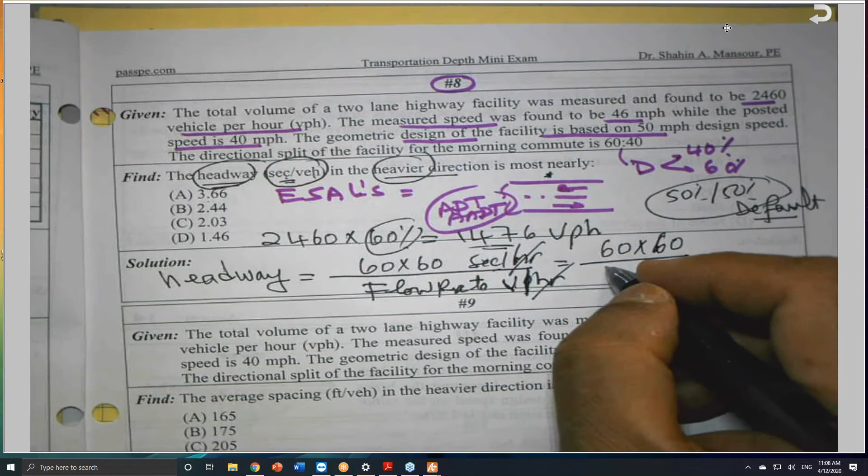So I got 60 times 60, and I have 1476. This is given to me based on the 60%. So this will give you how many seconds per vehicle. If you calculate that, it's about 2.44. This is what I got, so the answer is this here.

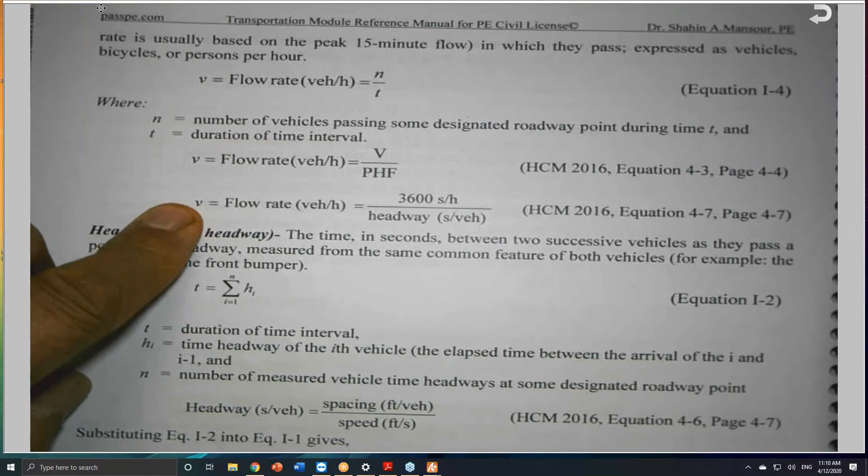So the headway definition, I need you to be aware of that. What is a headway? This is covered, I believe, in chapter 1 in my book, chapter 1 of the PM, since I have one chapter at the beginning. So the headway, it is flow rate, and here it is. The flow rate is equal to 3600 over the headway, or I can get the headway is equal to 3600 over the flow rate. This is an equation from the HCM 2016.

Try to locate the equations, or familiarize yourself with them. Whatever page number it is, you should know where the page is, and which chapter it is. You should know exactly where it is - you cannot go to the back of the book, look for the index, and see what page it's on. No, you should know which chapter, where this equation is, where this table is, where this chart is. Try to mark your book very well. If you study well and prepare yourself well, I believe you'll be able to locate subjects and sub-subjects easily. I'm not asking you to memorize everything in the book, but try to do your best, and I will do my best to keep helping you guys. Okay, so this is the first one.

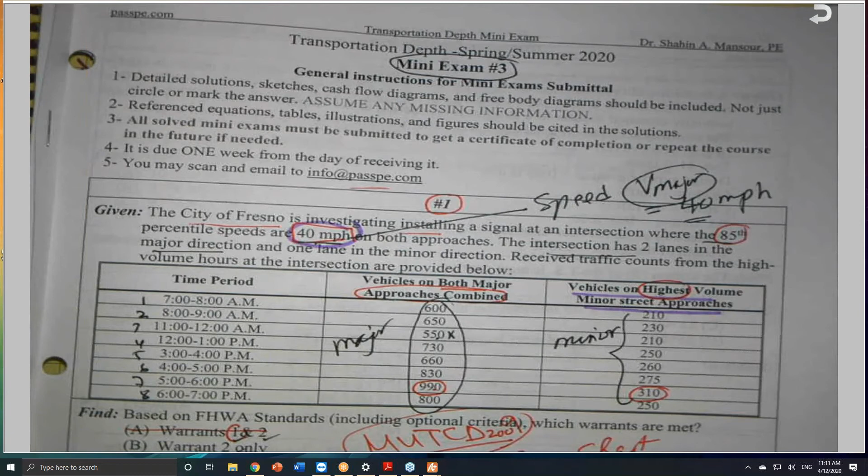To find the LOS in calculating the free flow speed, which one should be used as the free flow speed - the design or the question? We have something called FFS, and the FFS starts with the base free flow speed minus FL sub W, minus F right lateral clearance, minus 3.22 times TRD raised to 0.84, if I remember the equation correctly. We used this before, and as I told you, this is for a freeway segment, by the way.

A freeway segment - this number here, the basic free flow speed, must be measured, and we are using 75.4 as a default for freeway segments. And if you remember, we saw default values unless given otherwise. The second equation that we used in calculating the free flow speed is also for freeway segments, by the way.

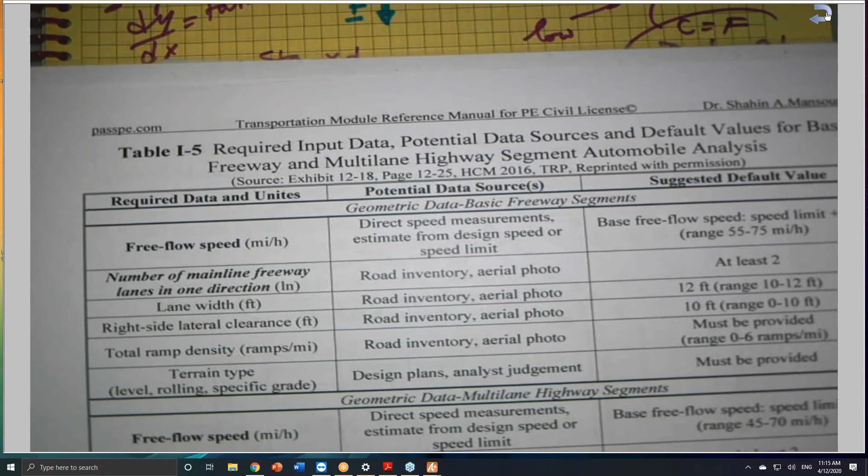This is the table I'm referring to, Muhammad, on page 74 of my textbook. This is the free flow speed, FFS, for the geometric, for basic freeway segments. Here there are some suggested default values.

He said that the basic free flow speed is speed limit plus 5 miles, this range here, and the potential data source is direct speed measurements, or estimate from design speed or speed limit. This is for freeway segment. For multi-lane highways, for free flow speed, FFS...

Also they are telling us we can use this, called suggested default values. But normally they give it to us, or there is another section—since you mentioned that, by the way, in the Highway Capacity Manual, it's not in agreement with this. They don't add 5 miles per hour, they add 7 miles per hour. And my solution, I looked at volume 4, and I found that they use everywhere the 7 mile per hour, not the 5 mile per hour as listed here.

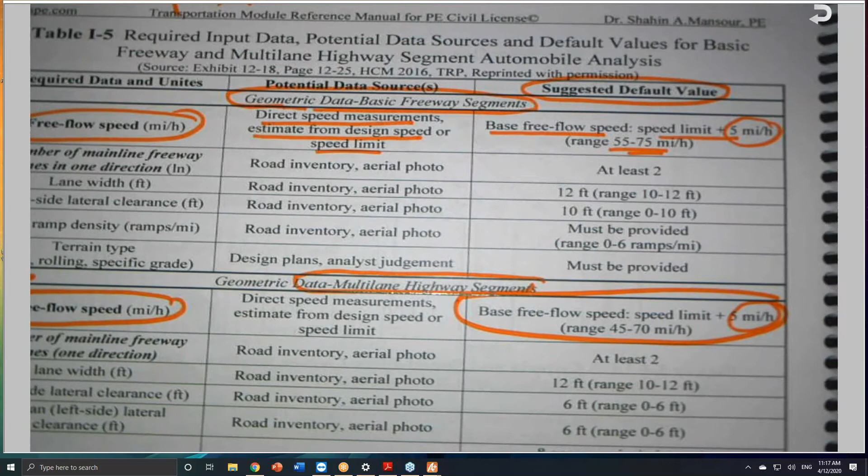This is table, at least you can look at it when you have a chance, table I-5, page 74 text. Okay, so look at this and let me know if you have any other questions, and I will be glad to send you whether it is a plus 5 mile per hour or a plus 7 mile per hour.

So in the table they are saying 7, or 5 in the table, but in the text and the problems they are using 7 — in the text and the problems in volume 4, they are using 7 mile per hour, and I use 7 mile per hour, by the way, in my second book. If you go to my second book, which I believe is the AMBM book, you will find that I use 7 mile per hour, and I told you why. So I hope this answers your question, and if it's not completely directed to the answer you're looking for, please let me know and I will be glad to elaborate more.

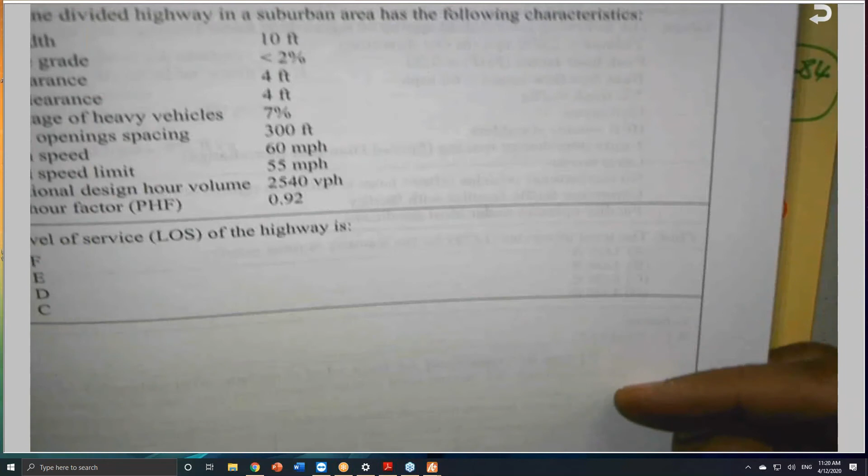Yeah, I know that, yes. So the 4-lane divided highway in a suburban area, and so on. So what is — solve it. Here it is: he gave you both the design speed and the posted speed limit. The design speed is based on the geometrics, because we design for a higher speed normally. But the posted speed is the maximum speed permitted on the facility. So the design speed normally is higher than the posted speed, unless in a very critical situation.

In a very critical situation, the design value is normally higher, because I design, as you know, based on a certain tangent length and curve radius, and so on — sight distance and all these things. So the design speed is normally higher than the posted speed, to be on the safe side. If somebody speeds up a little bit, he is not supposed to speed beyond the posted speed. The posted speed is the one that can stand in court, and the police or law enforcement officer give tickets based on the posted speed, not based on the design speed — whatever is posted, this is the one.

So look at it, and I will be glad to go over this problem, because I'm working on them also. Hopefully I can finish the solutions. Right now we are in mini exam number 3, and I'm doing all my best. Okay, so let us move on.

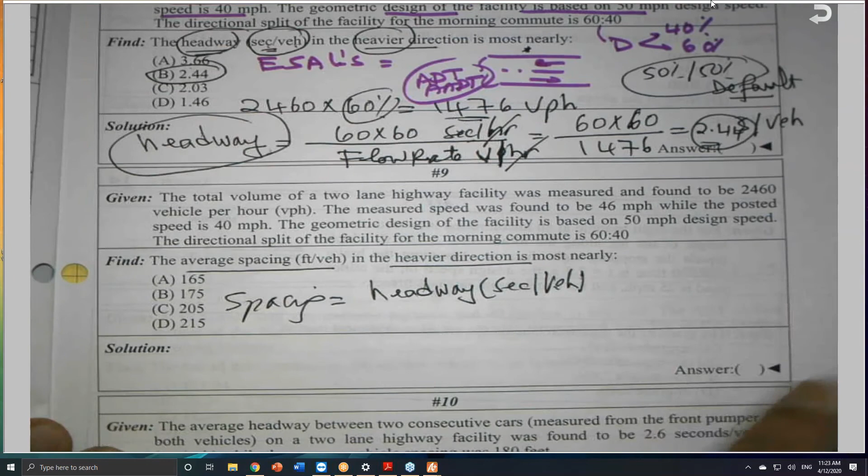If you look to my book, you will find there is one equation. The spacing is given by this relationship, which is a headway. This is second per vehicle, VH or S, times speed, and the speed must be in feet per second. So in this case, second will cancel with second, and this will give you how many feet per vehicle.

This is the headway, we just got it from the previous one, which is 2.44. This is second per vehicle times the speed. The speed, we have three speeds as mentioned in the problem: the posted speed, the measured speed of 46, and the geometric design speed, which is normally higher. The posted speed is 40 miles per hour, but at that moment we have 46 miles per hour, so I will take 46 mph.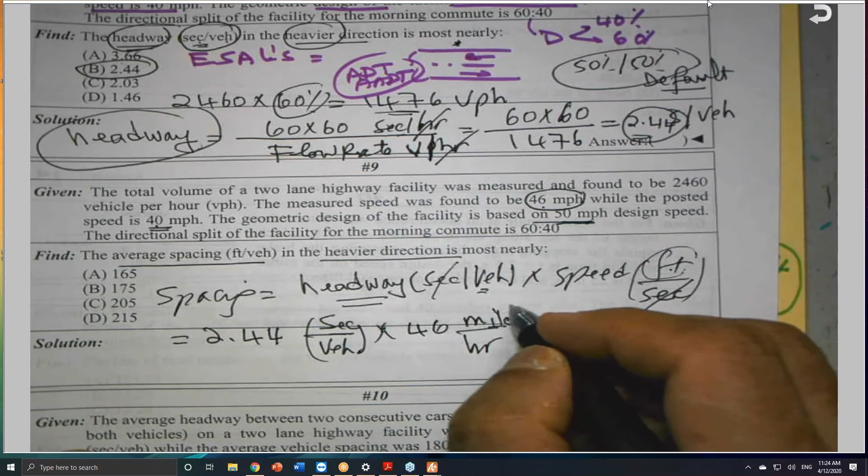In order to convert it to feet per second, as you know, the famous factor, 1.47 — do you remember the 1.47, which is from the stopping sight distance, 1.47 — this will give you feet per second. So if you do this calculation, you are going to come up with something.

So it is 2.44 times 46 times 1.47. This gives you about 164.99 feet per vehicle, which is about 165 in this case. And I will select the answer A.

The average headway — this is another problem, problem number 10, related to the same thing. A lot of problems. We talked about sight distance, but before that, let me go over and remind you about the peak hour factor. The peak hour factor is a factor less than 1.

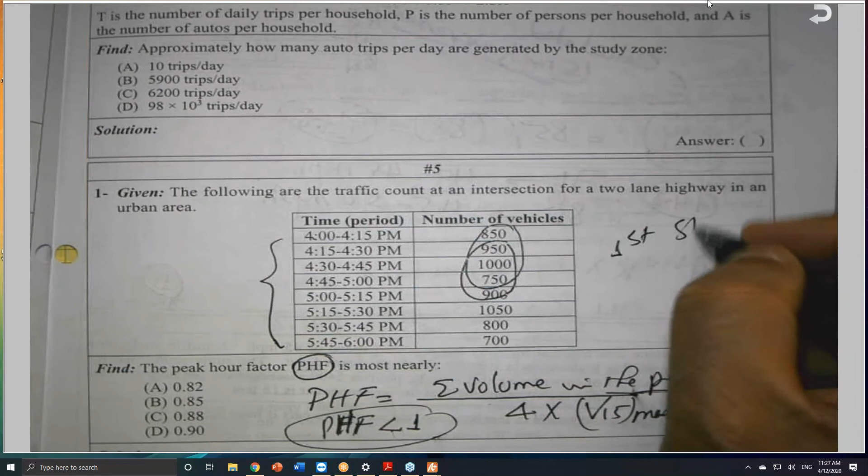The first step is to determine the peak hour. You will find that this number here is 1,000 and this is 1,050. So if I have only half a minute or 1 minute, you'll find that this quarter and this quarter have the largest values, and I have 900 here.

By inspection, you can say that this hour, from 4:30 to 5:30, is the peak hour. You can do that, but I need you to calculate it — between 4 to 5, 4:15 to 5:15, 5:30, and so on — and you will find this. After determining that this is the peak hour, the peak hour factor is: I will add the 1,000 after I determine that this is a peak hour. So this is a peak hour: 1,000 plus 750 plus 900 plus 1,050, divided by 4 times 1,050.

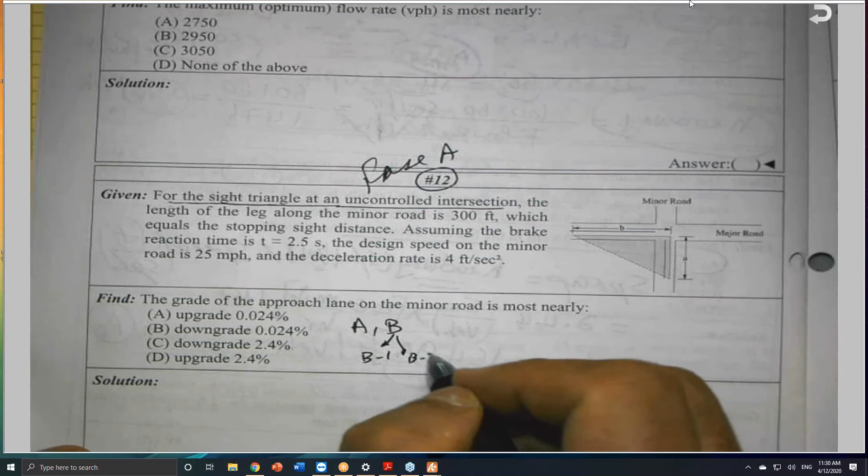For a sight triangle at an uncontrolled intersection, which is case A, by the way, this is case A. Do you remember the cases? Case A, B, and we have B1, B2, and B3, and C, we have C1 and C2, and after that A, B, D, E, F, and finally G, the one they added this time in the green book.

This is for roundabouts, and I sent it to you if I remember correctly. Roundabouts, a small paragraph they added. There are no calculations for this, but we have calculations for case A, for B1, B2, and B3. We talked about that.

C1, C2, A, B, C, D, E, F, do you remember, from left? All these things we already talked about. So try to do your best. Most of the time, if I'm not mistaken, but I don't know what they're going to ask on the exam, I believe maybe they are focusing on case A, but we need to be ready for all the possibilities.

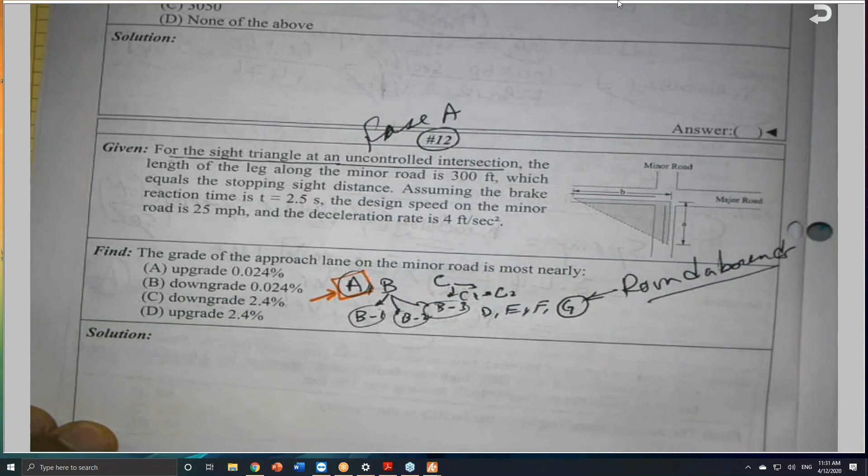So he said that the length of the leg along the minor road is 300 feet, which equals the stopping sight distance. Assuming that the brake reaction time T is 2.5 seconds, which is standard, the design speed on the minor road is 25 miles per hour, and the deceleration rate is 4 feet per second squared. This deceleration rate is very small, which is case A, by the way.

If you remember, the stopping sight distance, SSD, we have two types: on level roads and roads with grade. I talked about level roads. There is no such thing as a truly level road; it has a minimum G. Minimum G for level roads is 0.3%, if you remember, for non-snow areas and 0.5% for snow areas.

But for roads with grade, the G becomes part of the equation. For the stopping sight distance with grades, this is the equation, 1.47 times V times T, plus V squared divided by 30 times A over 32.2, which is G, plus or minus G. This is the equation we used a lot, the stopping sight distance on roads with grade.

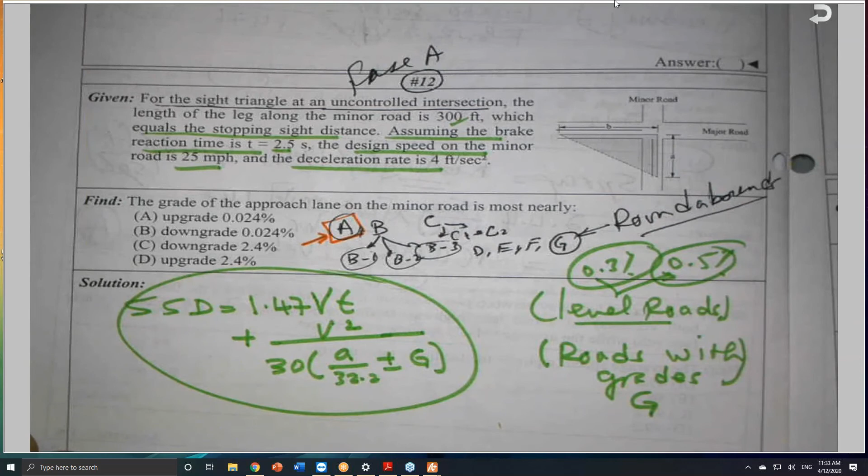Here he gave you the 300 feet along the minor road. But he gave you the deceleration, which is A, normally 11.2 feet per second squared. The little t, normally the default is 2.5 seconds, as all of you know, and the A, the deceleration rate, is 11.2 feet per second squared.

But here, probably he gave you something a little bit odd. So the grade of the approach lane on the minor road - is the road going up or going down? Whatever he gave you, downgrade or upgrade - here this is a major road and this is a minor road. So say there is a car here driving, and it was found that the sight triangle distance along this one is 300 feet. So what is the grade?

I will put all the parameters. This 300 feet is given. V is given, T is given. The only unknown here is G. Solve it and please let me know if it's downgrade or upgrade.

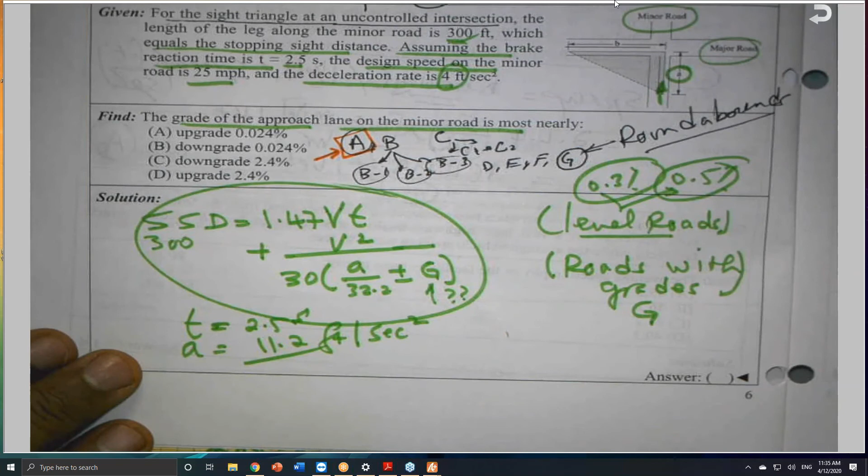It's a very interesting problem. I need you to be... just, I think, if I'm not mistaken, I believe the answer was C. Yes, it is, unless they change the numbers. Let me solve it, I don't like to...

So this is something I needed to be aware of. I will talk about the rest, especially signalized intersections. I added a little bit at the end, some problems related to horizontal curves - I believe I found that to remind you or to help you with horizontal curves.

I tried to draw, especially the problem that it has bearings or azimuths. For example, this problem here, let me draw it. Not necessarily every problem will be given on the exam with a drawing, a graph, or illustration.

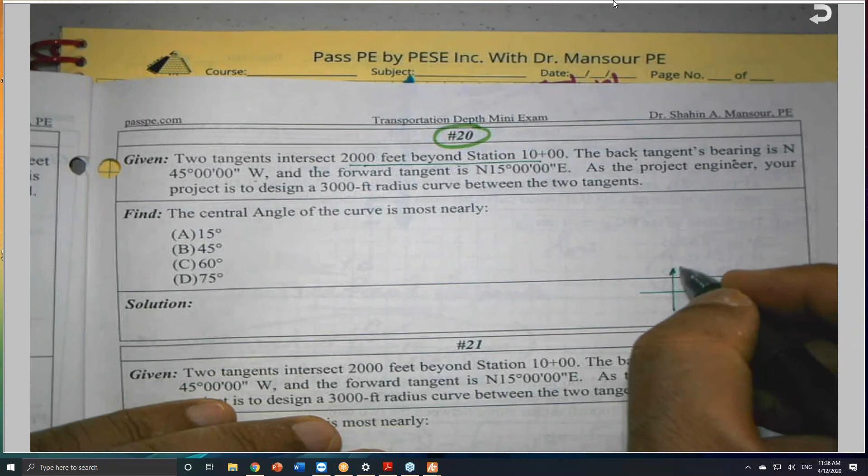Two tangents intersect 2,000 feet beyond station 10 plus 00. The back tangent bearing is northwest. I'll draw my coordinate system here: this is north, this is west. So northwest, north 45 west, here it is. This is the back tangent, and this angle here is 45 degrees.

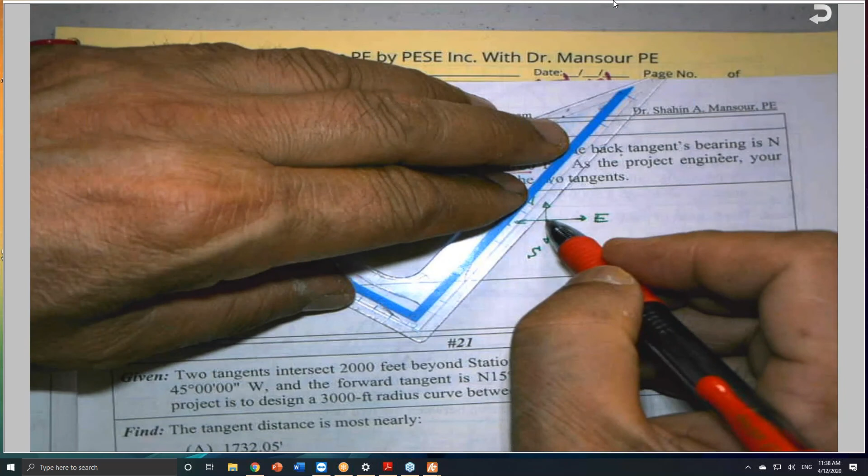So I will draw the forward tangent north 15 degrees to the east. Here it is - this angle here is 15 degrees. So this is the back tangent, and this is the forward tangent.

So two tangents intersect 2,000 feet beyond station 10. Station 10 is somewhere at any point, I don't know where it is - here it is, anything you'd like to say. This is station 10 plus 00. The distance from here to here is 2,000, so that means there are 20 stations, by the way.

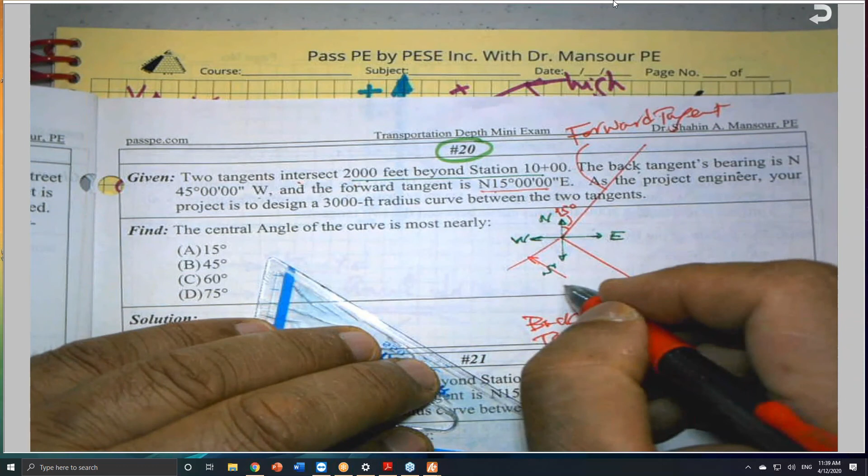The distance from here to here is 2,000 feet, and there is a curve connecting these two tangents. So I will connect a nice curve between these two tangents, here we go. Let me get a nice curve - since I say nice, I'm using my protractor to do that. Here it is.

And this is the radius, and this is the radius. It said that the radius is 3,000 feet. So this, I will call PI.

The first question: what is the central angle? This here is the central angle, delta or I. If you extend the back tangent a little bit, this is the deflection angle - from here to here is also delta, do you see that? We need to master this. This is the beginning of the curve, and this is the end of the curve, the EC - or PC and PT, point of curvature and point of tangency.

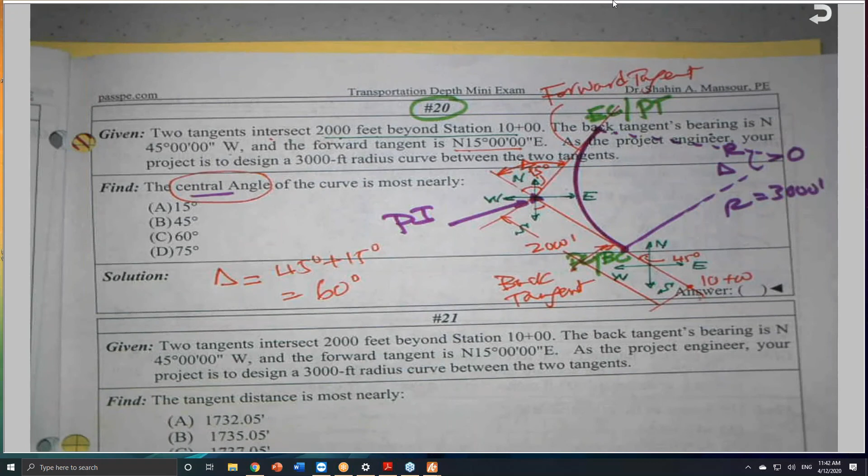Agree or disagree? If you agree, that's good news. If you disagree, it's still good news, because at least we can review. Again, try to draw as much as you can during your studying sessions - try to draw as many drawings as you can, because this will help you later when they come with some very tricky questions. They are really doing very tricky problems. So if we prepare ourselves, I believe we will be in very good shape.

So problems with bearings and azimuths are important. Problems with coordinates - and we'll solve a problem if you remember practice exam number 1 - coordinates are very important also. Try to pay attention to these types of problems, whether coordinates, azimuths, or bearings are included in the problem. Try to do your best.